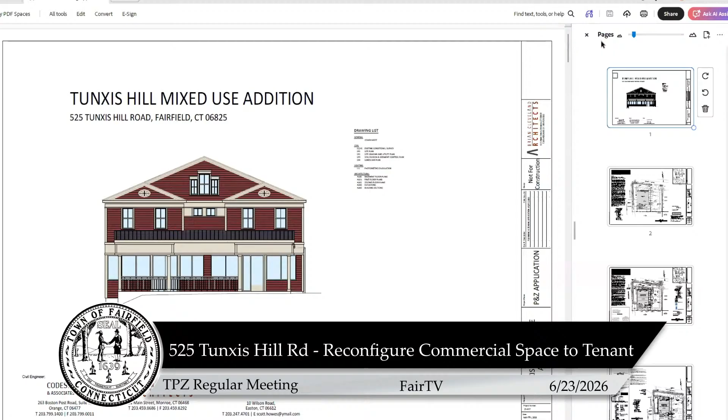So here you can see the overall existing site plan. There is also a sidewalk that comes up from the handicap parking space here to the covered walkway that comes across the front of the building.

The face of the building is currently 13.7 feet away from the property line, and I know that's going to be a point of conversation because I believe the regulations state it needs to be within 10 feet of a property line. Obviously, moving this building isn't viable, but we are making an extension of the front canopy closer to that front roadway as a way of hopefully meeting that regulation for you guys.

To quickly get into the overall plan of what we're looking at: the plan is to add 2 apartments and a second floor to the building, constructing it over the existing retail space, so we're maintaining the retail space that is there. The 2 apartments will be 2 bedrooms, 2 bathrooms, approximately 1,200 square feet each, accessed off the rear of the property.

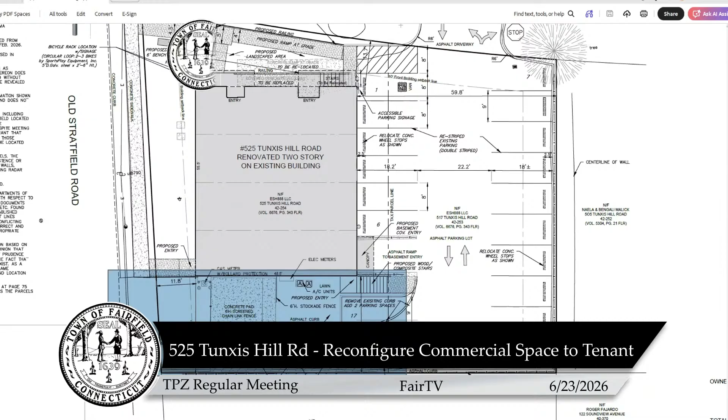We are maintaining a total of 18 parking spaces by eliminating the driveway currently coming in off Old Stratfield as a throughway to the parking area, and adding 2 parking spaces back in this location. All parking spaces meet the Fairfield requirements for size. We are maintaining, though, that apron curb cut off Old Stratfield for continued collection of refuse from the property as well as some snow storage.

We are reconfiguring the ramp at the front of the property to make it a truly handicapped accessible ramp that brings you up to the covered walkway across the front of the building. We've also indicated that we're extending that ramp over towards Old Stratfield to improve pedestrian connection from this corner to the retail space of the building. We're proposing a small bench be located where that sidewalk meets the building, as well as providing a bike rack for 2 bikes to be stored close to the face of the building near the retail area.

We have presented this plan to the Connecticut DOT since this is a state route. One of their comments was that they wanted the addition of a bus stop location here at the front of the property, so we've extended the sidewalk in this area all the way to the curb line for that purpose. I'm sure there will be some bus signage included in this area; you can see that noted here, this GBT sign.

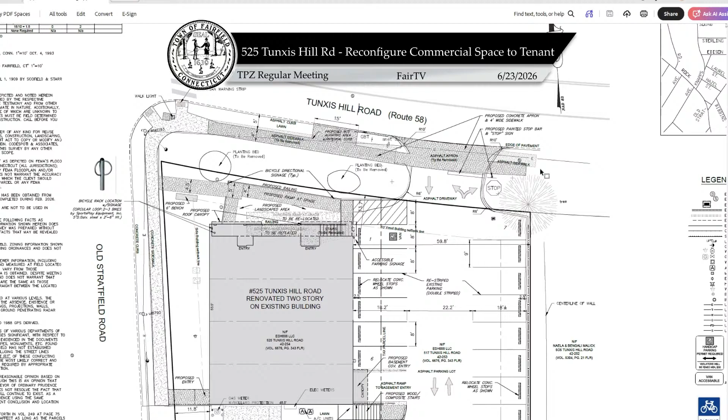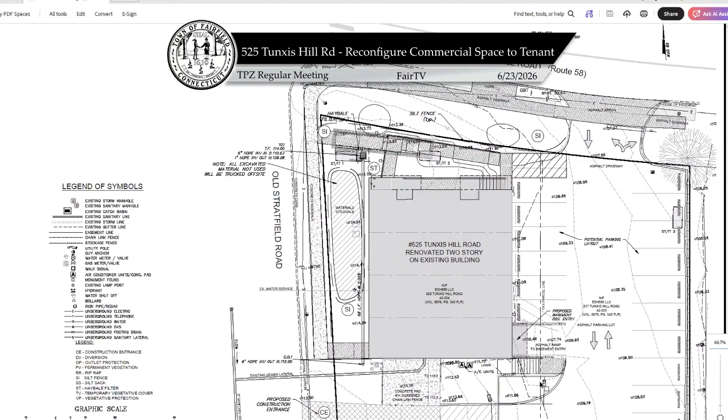I think the next sheet is our stormwater management. Do you want to take this one, Bob? Yeah, I could pick up on that. If you could zoom in on sheet SP2, go back a sheet, Brian. Yeah, that's got the galleries on there.

Looking at this plan under existing conditions, as Brian pointed out, we have an existing building and existing pavement and parking lot. That raises a unique condition with regards to stormwater management, in that the Fairfield Engineering Department has a policy of not taking into account any existing imperviousness on the site. We had conversations with the engineering department, and what they were willing to grant us for this application is that looking at the existing pavement area, they would allow us to take credit for that.

We are providing the stormwater management for the addition, for the second floor addition, because they are considering that to be the constructible area for the project. So we looked at the proposed building footprint area and did the hydraulic calculations, and came up with a gallery system located in the upper area underneath the sidewalks. Those galleries will provide enough storage volume to address the water quality volume in accordance with the 2024 DEEP Water Quality Manual, as well as providing for the 25-year peak rate of runoff for both peak rates and volumes of runoff. That's basically a quick overview of the stormwater management system for the project.

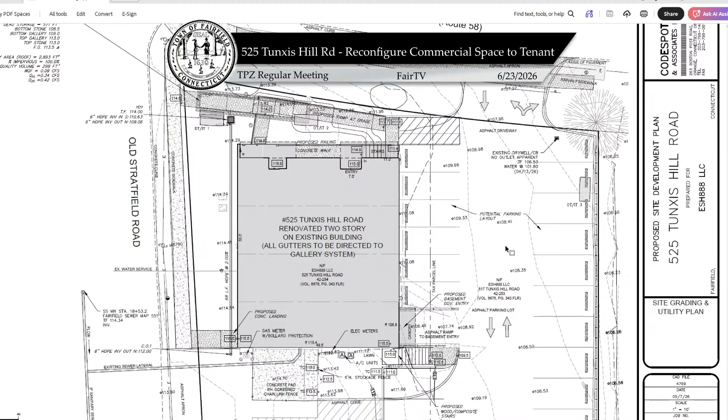So I guess once Brian wraps up with the rest of it, if the commission has any questions, we'll certainly try to address them. Thanks, Bob. To move on, we have the typical details in here relative to the soil erosion and sediment control measures, with some typical details, I think from your guidelines.

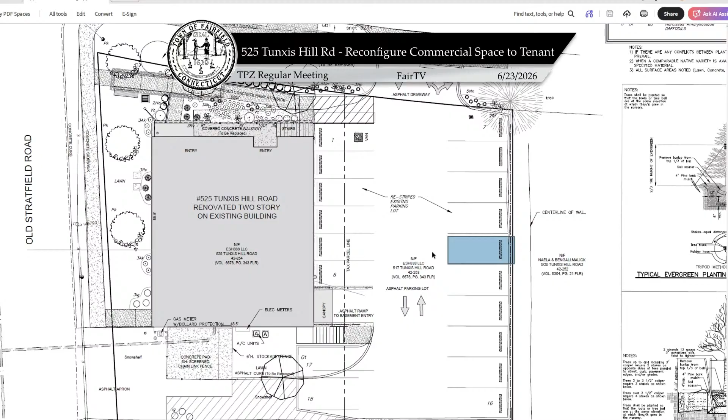The landscaping plan - unfortunately our landscape architect couldn't join us this evening, so I'm going to try to go through his plans and point out some things. I believe some of the regulations in Fairfield state that for every 10 parking spaces, we're supposed to provide a shade tree within the parking areas. We have an existing tree at the corner of the property, and we're proposing a new shade tree near the rear of the property to meet the intent of those guidelines. We would not really be able to integrate a new tree into the parking area itself because we're required to provide the 18 parking spaces, and that is how many we are showing here. So we're trying to provide those trees where we have the ability to do that without impacting the parking layout.

Additionally, we are showing an extensive amount of landscaping between the covered front porch here and the new handicap-accessible ramp that leads up to here. So this area in between those two paved areas is shown to have landscaping, as well as some ornamental trees, hopefully that don't get in the way of the signage for the building, and then some low planting along the street side edge of that handicap parking space.

We are also showing 3 ornamental trees along the side of the building, also to hopefully enhance the overall aesthetic of that side of the building. Currently there's no windows or anything there, and it's a very prominent elevation, so we're trying to soften it up by adding landscaping to that area, in addition to the new windows that we're going to have as part of the apartments being added to the second floor.

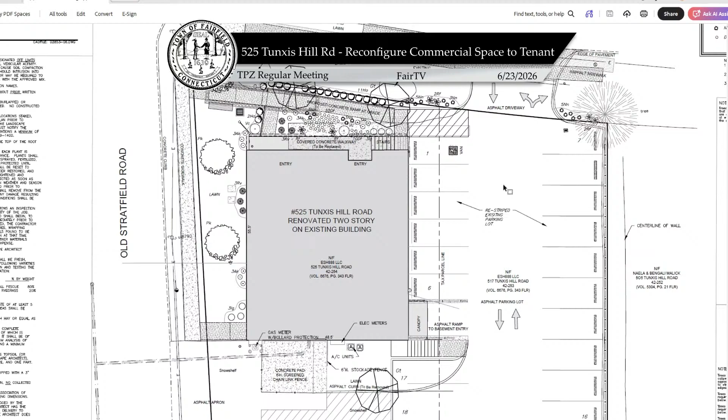We also recently received the Connecticut DOT design details for this development, so we've provided those to you just recently to include in the application.

Access to the apartments is through new exterior entrances on the back corners of the building, leading to independent stairs up to the 2 apartments. Once upstairs, there's a small balcony for each apartment, with normal amenities you'd expect: 2 bedrooms, 2 bathrooms, laundry, full kitchen, dining, living, etc.

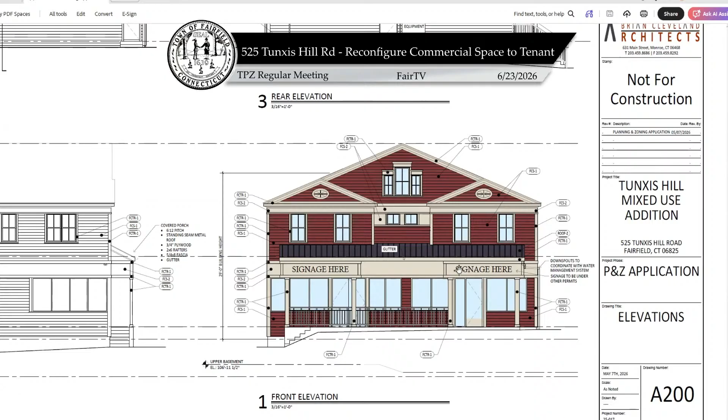It doesn't show obviously, but there's going to be a series of trees planted across the side elevation that faces Old Stratfield, so that'll soften up that elevation. And as I said, we have a series of windows for the apartment up in that area.

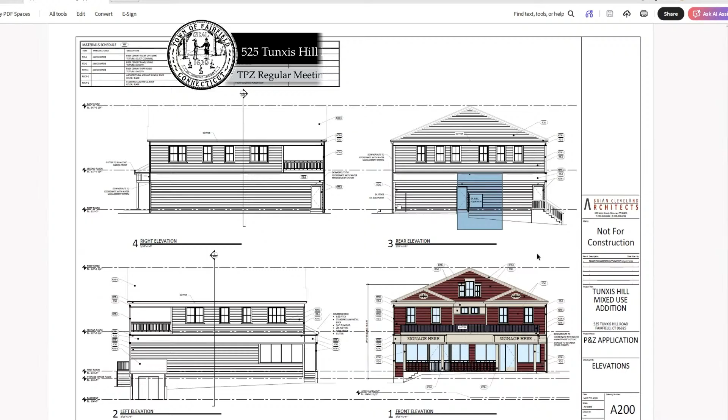All the utilities are going to stay off the rear of the building. The gas meter and electric meters are already there, so we're just expanding them to accommodate the 2 apartments.

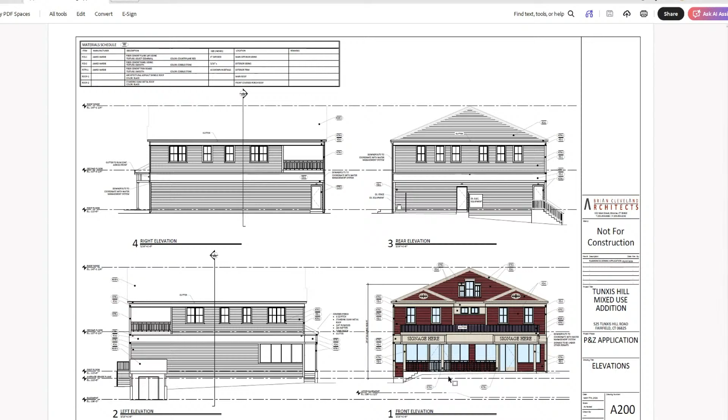As Bob was saying relative to his stormwater system, we're taking all the roof leaders of the building and bringing them to the Old Stratfield side so we can integrate them into the stormwater retention system. The signage will be part of another application the owners will have to submit to get approved, but we've provided a couple of locations for the 2 retail spaces within the front canopy that sticks out from the building.

And with that, I will turn it over to the commission. Thank you, Mr. Cleveland. Questions, Commissioner Monahan?

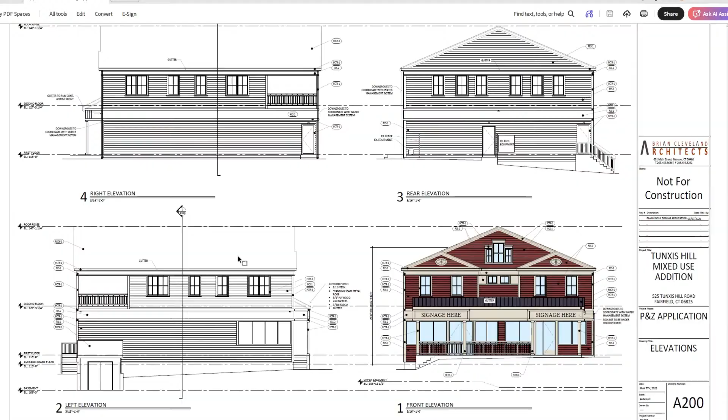So the application reads differently than the explanation on our presentation. It says compliant site plan review request to reconfigure an existing first floor commercial space into tenant spaces and add second floor with residential units. So the first floor will be first floor commercial into two commercial spaces, then two tenant spaces above, correct?

Correct. When I first read this, I was looking at it as if downstairs was also potentially going to be residential. So it's two commercial and two residential upstairs. Correct. Now, the retail commercial spaces don't necessarily need to be made into two units, but we are setting this up so that it can be done that way by adding this recessed door.

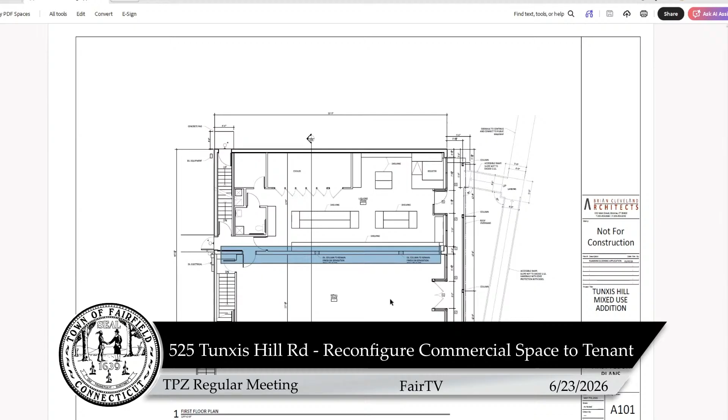This one on this side of the building is already there. And then, as I said, we're providing a new wall in between what could be two commercial spaces. Okay, thank you. Commissioner Levy?

And with respect to the setback, do I understand you correctly? You're going to extend the front awning by about 3 feet? Yeah, correct. So to the face of the building currently is 13.7. There already is an awning that sticks out across the front of the building, but I don't know that the regulations specifically state that awning is part of the building setback or not.

But certainly to the corner of our proposed canopies, we are going to be almost 5 feet closer to the property line. So we're going to be somewhere around 8.5 to 9 feet away from the property line to the edge of our canopy.

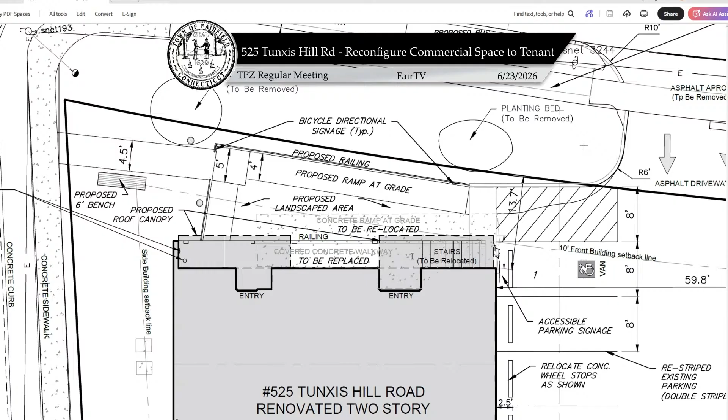And will that awning or canopy be of a permanent nature? Our setback says the shortest distance between any part of the building or structure, so it would seem that it would have to be more than just a retractable awning. And to the extent that unroofed terraces do not qualify, putting a roof over that area would seem to make it part of the building, which could be considered for purposes of setback.

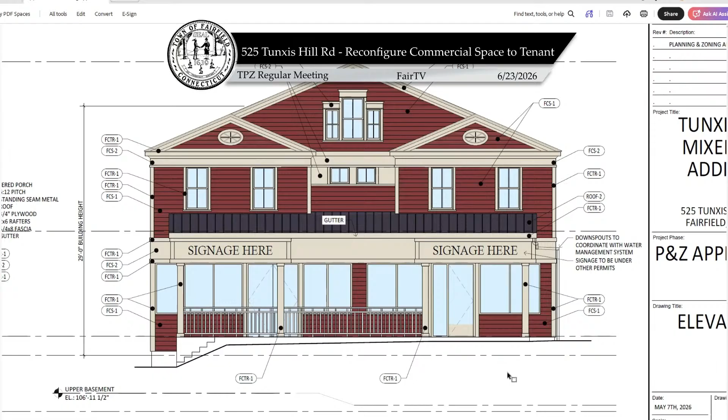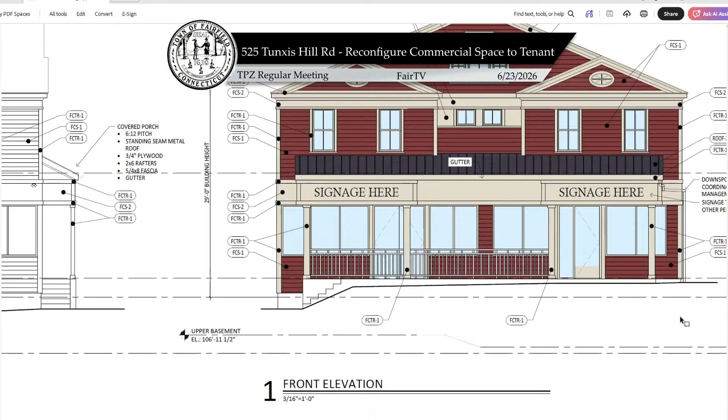So, thank you. Mayor Randolph? Couple things. Right now you said you didn't have enough space in the parking lot for trees. I think we've got a current provision that allows if you have low impact design, you can waive a parking space, correct?

There is a section within the parking regulations that does allow you to modify the parking in order to add a tree, if that's what you would like to do. And this is, I think, our first one where you don't have minimum parking requirements. So had you considered eliminating a parking space to accommodate that tree?

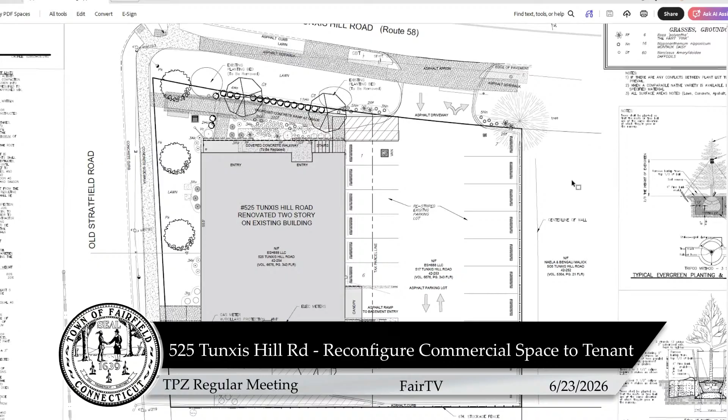To our knowledge, we were going to need to provide the minimum number of parking spaces based on the parking tables that we saw within the regulations. So no, because of that, we assumed we had to provide all 18 parking spaces.

They don't need to, you right? The commission has the ability to modify the size of, under 25.11.6D, two of the spaces to create the inset for a shade tree if that's what you would prefer. Yeah, that would be a request, not a condition.

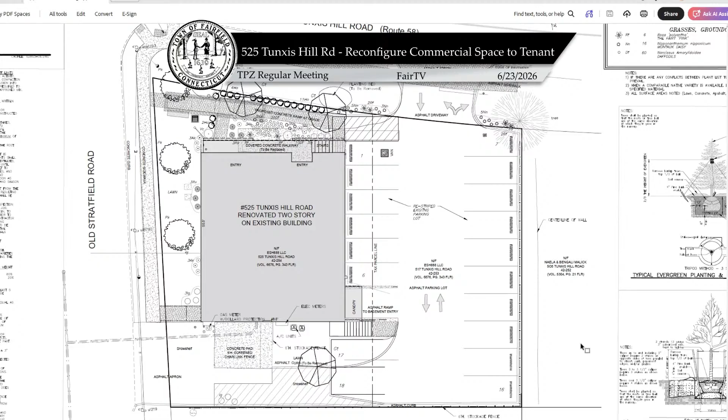So secondly, if you look at your Old Stratfield Road elevation. We're working on design standards. We don't have them passed yet, but one of the things we're trying to avoid are blank walls. And you got a big blank wall there. Is there any way you can not have a blank wall? I mean, other than just doing it with fake trim work, which is not necessarily windows? The retail space really does require having that wall space within it for display.

Clerestory windows? I mean, we can certainly entertain it. Based on the fact that we do have windows on the second floor, we believed that we met the intent of that requirement, as well as the fact that we are going to be planting along that elevation.

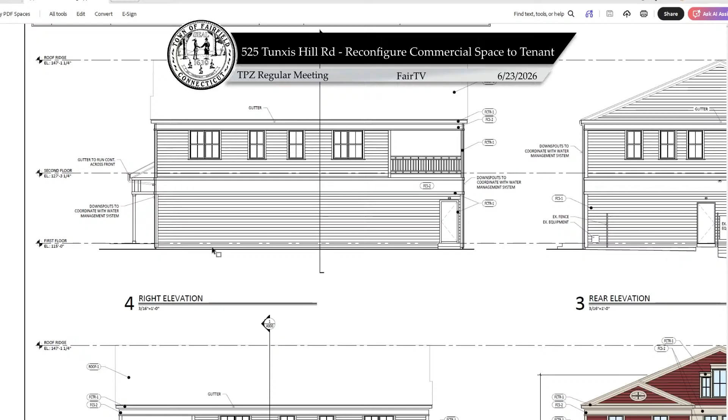Well, we haven't passed it yet, so you comply with the current standards, but we've got a new standard that basically tries to avoid blank walls, and this is a big blank wall. But I have to say, the design of this building is thoughtful. It's a positive contribution to the neighborhood. There's some pretty utilitarian buildings around there, including the existing building. This is really a thoughtful design, mixed use building, the type we really want to encourage. I can tell that some really good intent has gone into it, and we appreciate the thoughtfulness of this.

All right, other questions from the commission? I have one more question, Commissioner Monahan. Is there a reason why the liquor store would remain on the corner and not be on the side where the parking is? I mean, you would think leaving the liquor store, you'd want to be as close to your car as possible with heavy bottles, boxes, et cetera.

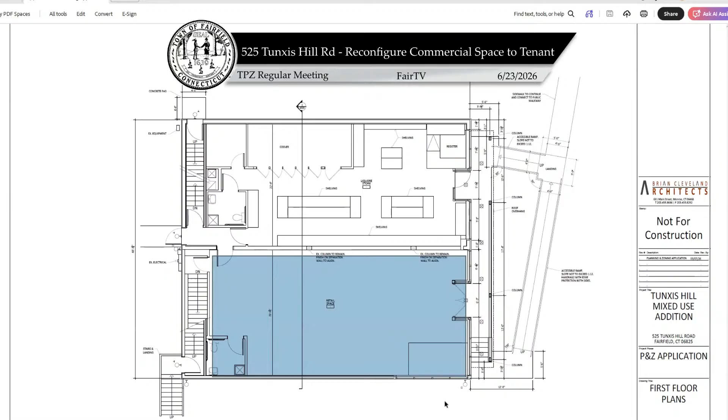And that would maybe alleviate the flat wall if you brought the windows over to the other side. I know you have your own plans for the building, I'm just asking if you thought that was important. Based on the understanding that the owners are going to want to have a space here for themselves, the access to the basement is from this side of the building down this set of stairs. So having the liquor store on the parking lot side of the building is not really feasible relative to how the owners are going to divvy up the space.

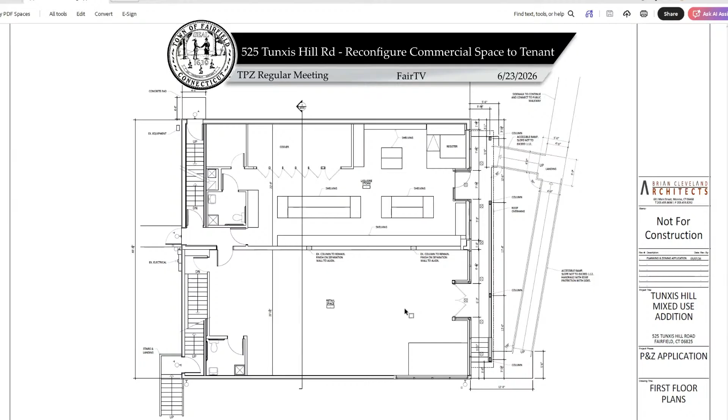Any further questions? I have a question. Go ahead, Commissioner Brown. How many bedrooms are in the 2 units, and how many residential parking spaces are dedicated to each bedroom in each unit? So we have 2 bedrooms for each of the 2 apartments, so a total of 4 bedrooms. Per the standards, we were showing 2 parking spaces. I believe it's 2 parking spaces per dwelling unit.

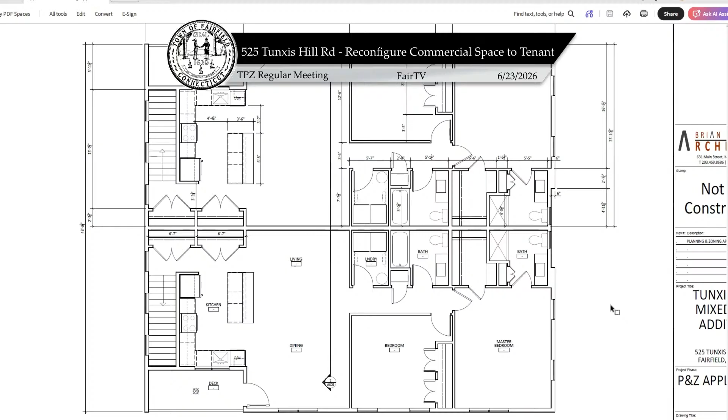Okay, and our agenda does not state which regulation this is being applied under. I'm trying to figure it out. We have the design business district revised regulations, which under those, to me, this would require—and by the way, I think your project looks quite beautiful, much better than what's there now. I'm trying to understand if we're following the right regulations. So a compliance review would not be allowed under our design business district regulations because you're doing exterior modification, right? Quite a bit of exterior modification.

But then we have another regulation that allows conversion of commercial to mixed use, which would be under a compliance review, but I believe that requires the commercial to have been vacant. Perhaps you or our planning director could explain that, so we know what regulation we're going under here.

This is a compliance review. Right now, the liquor store is not vacant, but they are adding 2 residential units. So per the regulations we adopted, mixed-use developments are by summary site plan review, not a special permit.

So many folders. So it's under section 7.4.1.

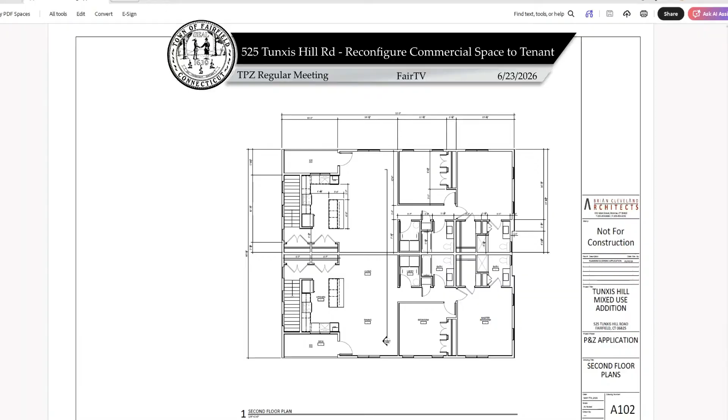So this is an existing 1-story commercial building, which is simply adding 2 residential units via a second and third floor above. So this falls underneath the requirements for a site plan review within 65 days only.

Although 6.3.4 seems to relate to residential to commercial as opposed to the reverse, which is what this is. I think what makes it a little confusing is that they're not tearing the building down and building a new building, but it's not a conversion.

What, then, is a conversion? Converting commercial into mixed use. By an addition -- pardon me? -- by additional square footage above a pre-existing ground floor commercial space.

Okay, so just so we could all be clear, the regulation we're going under is 6.3.4. Is that spelled out somewhere? I don't see it anywhere, but... And you're looking under Z, which is page 27 of our updated zoning regs.

Residential provided, shall not be located on the ground floor -- that's a permitted use, which does not require a special permit. But again, at the top of all the designed business district regulations, it says if you're doing exterior changes, it does require a special permit, because there's a different type of review for a special permit versus compliance.

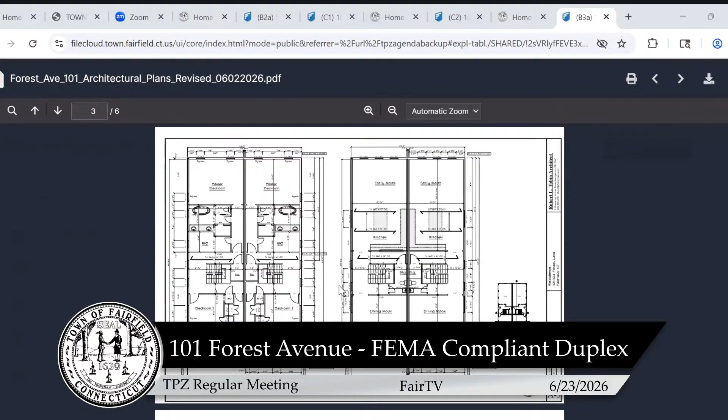Yeah, I'll just ask my question. I know Mr. Mullins is not here, but you guys are familiar with this. We're just pulling it up. Does that have everything on there? Okay, do we have the survey, is that part of this? Maybe on the other sheet. Director Horgan, it's a different file. Okay, so if we go back, Forest Avenue 101 site plan revised PDF, we'll just go to home. No, it's not the architectural, it's a separate one. Just press OK. Okay, just go to the site plan revised. Okay, second one there, that one, not the, yes, okay.

Yeah, so scroll down, keep going to the bottom. So yeah, it looks like this whole area in the front, the bib, is all impervious. Yes. Does that meet our standards? It's not the beach district, so only in the beach district do we not allow for impervious driveways. In other areas of town, they can provide an impervious driveway, they just have to provide stormwater detention for it.

So the trench drain accommodates that? Well, they do the calculation based on all the impervious coverage for the site, and then the trench drain probably connects that based on the drainage flow and then sends it back to the system. Yeah, so that curb cut is gonna be 40 feet? 30, I see 20 dimensions, so the curb cut's 40 feet? Generally for duplexes, yes, they end up having to provide independent access for each side. Even though it's a single parcel? Yes. We've got no regs that prevent a 40-foot curb cut? Not for single family residential parcels.

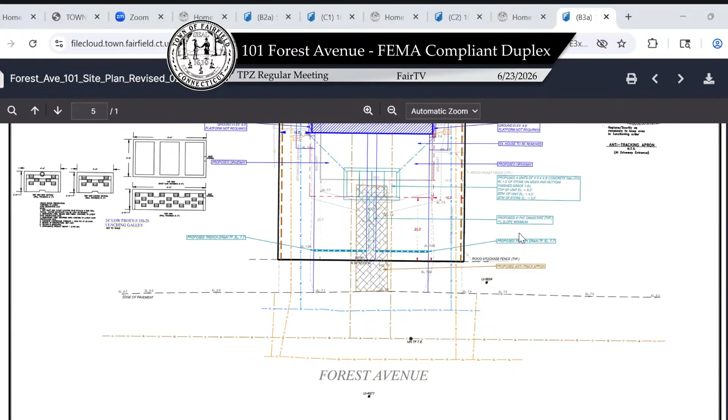Through the chair, but my concern is that we don't have a mechanism. Well, but this is not really super germane to this, since it's not in the regulations, which is what you're getting at.

So we can have this conversation in potentially considering another regulation to address that. But Commissioner Monahan's right, there's nothing to do with the current situation. I think there's no sidewalk for a reason, and we don't have a regulation currently to give us some mechanism to address it offsite.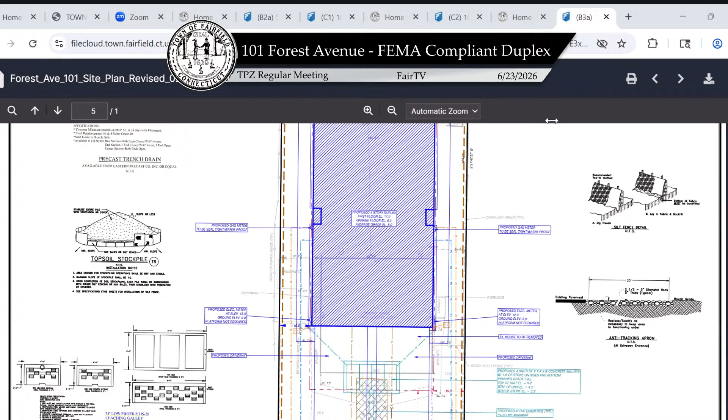Okay, all those in favor of the motion to approve with staff conditions and to adopt the findings as articulated by staff, please raise your hand. Thank you. Motion passes unanimously.

Next, we'll go to our public hearings, beginning with 1073 North Benson Road, a special exception application request of Fairfield University for a new campus building, Innovation Hall for science and engineering studies, in a Residence R3 zone.

Good evening, Attorney Fallon. Good evening, Mr. Chairman, members of the commission, good evening to you, members of the public. For the record, my name is John Fallon. I'm here representing Fairfield University, and we're very proud to bring before you this evening our proposal involving the new Innovation Hall.

I described that in some detail in our statement of use, but I'll briefly summarize it. First, as you'll see tonight in our presentation, we're located in the heart of the university's academic corridor. We're not visible from outside the campus. And what we're seeking to do here is address the growing need for sophistication in what they call STEM education. What is STEM education? I had to learn that myself. STEM education is an interdisciplinary approach to learning, integrating science, technology, engineering, and mathematics.

In addition, you'll see that our current needs in the School of Engineering require additional space. The reasons for that are clearly that current engineering trends call for increased space per student and an increased amount for equipment storage. The Innovation Hall is designed to address those specific needs of our School of Engineering, which is presently housed at the Bannow Science Center. The new building will also be home to academic centers of excellence, such as the Center for Coastal Climate. These centers are gathering locations for existing students and faculty to collaborate on pressing social needs, as highlighted by the research and accomplishments of our faculty and students.

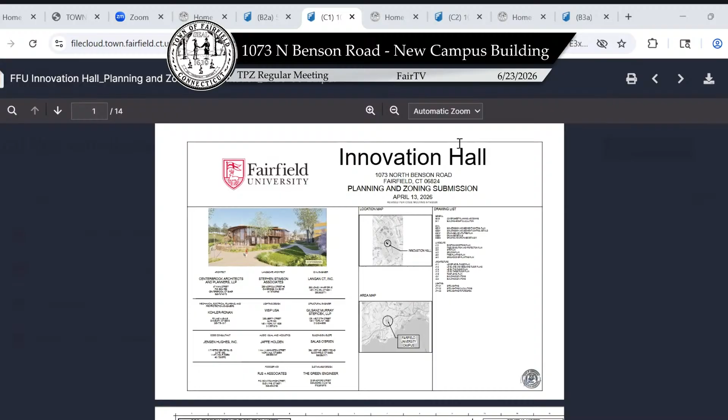So what this really is, Fairfield University's reputation has grown astoundingly over the last few decades, and I think this commission, without pandering, deserves a great deal of credit for that, for sharing in our vision and allowing us to establish such a preeminent institution of higher learning. This is another example of where we are seeking to continue adapting to academic needs and the needs of our existing students and faculty. I emphasize that because this is a program and a building that will serve the needs of our existing staff and students, and is not designed, nor will it in any way, increase enrollment. What it will do is enhance our current student experience, as opposed to any enrollment growth.

It will capitalize on existing infrastructure for parking, dining, and all other student support services. And there won't be any increase associated here with traffic whatsoever.

What we'd like to do this evening, with me tonight is Mr. David Frasinelli, our Vice President for Facilities, Campus, and Auxiliary Services. A number of consultants have worked very hard on this proposal, and I'll introduce them shortly. I'll start with Greg Tizzolo of Stimson Studio, who will review with you, based on the plans you have, the existing conditions and the proposed site plan. Greg.

Good evening, commissioners. My name is Gregory Tizzolo, landscape architect with Stimson Landscape Architects. Thank you for having us. I'd like to give you a quick orientation to the project as it sits in the campus. You can see the building in the sort of S-shaped arrangement, sitting right in the middle.

But maybe what we'll first do is skip ahead to a slide. This slide shows an existing survey of the site as it sits today. The site is covered in a fair amount of trees, the campus chapel to the left, the campus center to the north, and the Bannow Science Center to the right. The site has approximately 23 feet of grade change, the high point on the north side of the page, sloping down to the lower right.

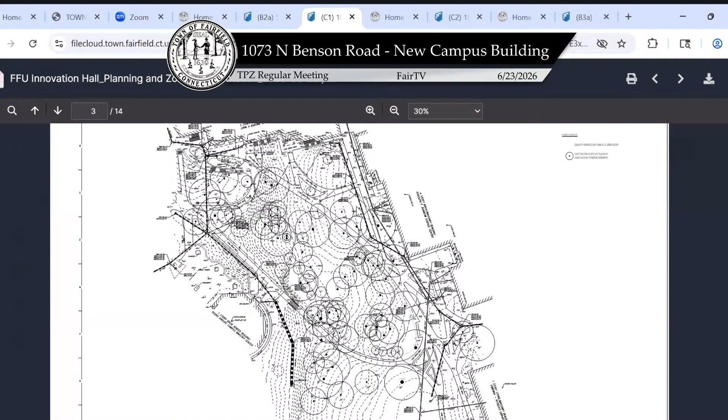We performed an arborist survey of the site in question. If you could go to the next slide, please. We performed a tree inventory, did an analysis of 94 trees on site. A number of them will be removed for the project. I'll talk a little bit later about the trees that we're proposing to go in their place, but it is the case that a number of these trees will be removed.

Amongst the trees on the site, predominantly oaks, red and white oaks, but there are some non-native Norway maples and black cherry. Those are native, but not desirable. So we can talk a little bit more about trees in a moment. For now, you should just know that a number of removals will be required for the project, and we're taking those considerations very carefully.

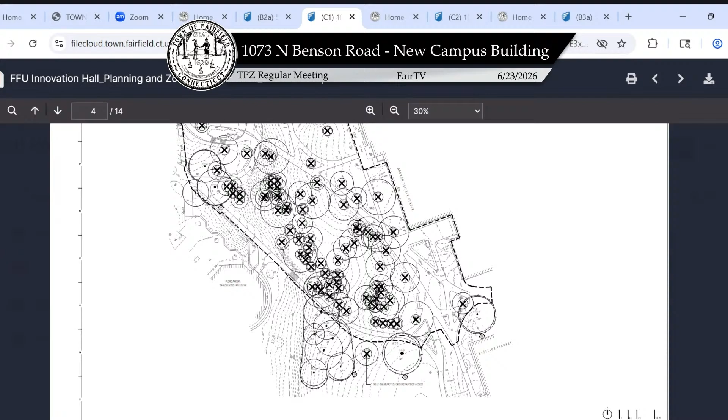On the perimeter of the project, you can see in the dash line our approximate limit of work, limit of disturbance for grading. There may be some additional disturbances outside for things like stormwater management, et cetera, but essentially for the regrading of the project, everything is happening inside the dash line. I think you can see on the south a number of trees that are kind of peripheral to the limit of work that we're taking measures to protect through tree protection during the construction process. Next slide, please.

This plan is simply showing the ground plane materials. There's no trees shown on this drawing, but essentially what you'll see is a series of reestablished campus pathways. On the south side of the building, between the chapel and the new building, is essentially a recreation of an existing pathway. This pathway has stairs in it. It is not ADA accessible, but it's sort of a minor route in terms of campus circulation.

The main... let me orient you to the doors first. In the upper left, we have a door. That's up on level 3. And then if you look to the upper right of where the arrow is, there's additional doors right opposite the campus center, down 1 level. So that's at, I believe, level 2.

And then along the right side of the building, you see that long S-curving path. That is a pathway that's been elongated to allow for ADA compliance. So essentially, we're creating accessibility throughout the project site. It doesn't really exist today; that's an overall improvement the project brings to the site by creating this ADA accessibility route through campus. And if you follow that curve all the way down to the lower right, there's an additional entrance down at level 1.

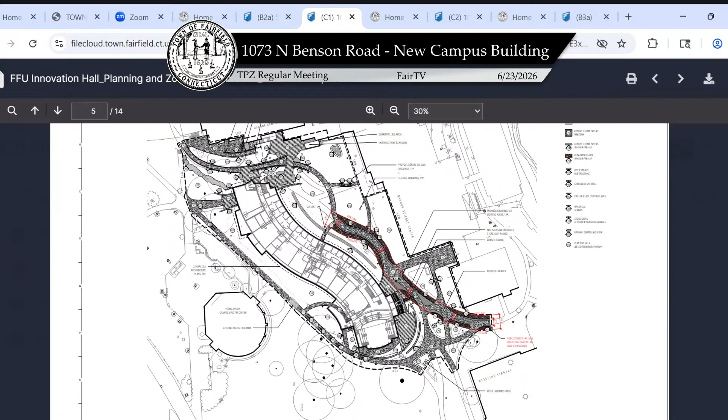On this sheet, in the submission there are two plans that talk about planting. This one talks about the tree canopy. I mentioned 94 trees were surveyed; we're able to protect 11 of those trees, meaning 83 are coming out, and we have 47 going back in per this plan. We tried to plant as many as we could, and felt this was an appropriate number to revegetate the site without overcrowding it in the future. We're replanting with native species with great longevity, an investment for the campus for the long term.

I believe that's the last slide I'm going to speak to. Could you slide down one more? I think that's right—I guess maybe some... Brian? I'm all set. Yes. Okay, thank you. Greg will obviously be here to answer any questions you might have.

I call on Brian Phillips of Langan Engineering. I think you know Brian well from his representation of the university on numerous of our other proposals. Brian's going to give you an overview of the proposed site engineering and drainage. Thank you, Attorney Fallon. Yes, I'm Brian Phillips, a professional engineer with Langan Engineering. We're at 555 Long Wharf Drive in New Haven.

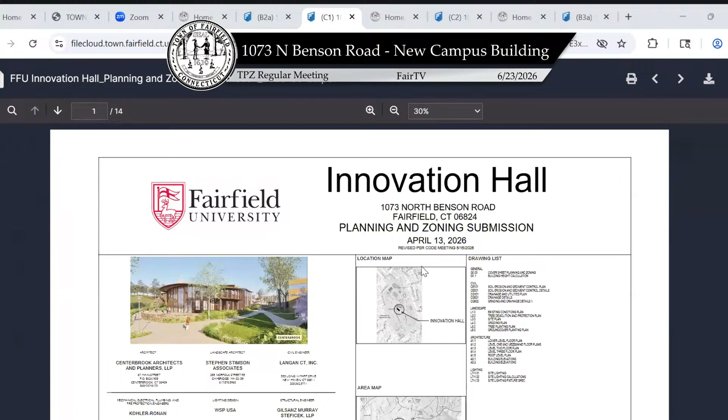I'm not sure if it's the previous page, but the first page, please, after the title, shows the grading and drainage plan. So the proposed infiltration system is at the bottom right of this page, located at the lowest elevation point of the site, allowing everything to flow by gravity.

Everything will be collected into the system, given an opportunity to infiltrate into the ground and promote infiltration and recharge of the groundwater table prior to being discharged through a weir structure, allowing the water to be held back. Then during larger storm events, it flows over the weir and is directed down towards the campus stormwater network.

We did perform some borings and test pits on site, so we were able to get a profile of the soils, and we will do additional testing for construction as required by Fairfield Engineering to reconfirm that analysis.

Did you do the double ring infiltrometer test in the area where the infiltrator galleries will be? We have not done a percolation test or borehole infiltration test yet. This area is a heavily trafficked, very central point of campus, so we're trying to be mindful of when we do this testing and start poking holes in the ground. But we did do borings, so we have a good understanding of the soil conditions in this area.

I'll note that our analysis takes into account a very low infiltration rate. Traditionally on campus we've done infiltration tests all over, and we've seen rates of 5 inches per hour or greater. In this analysis, I believe we used only about 1 inch per hour. So even if we had more, it could cause the system to get smaller. We're not proposing that here, but that's what that essentially translates to.

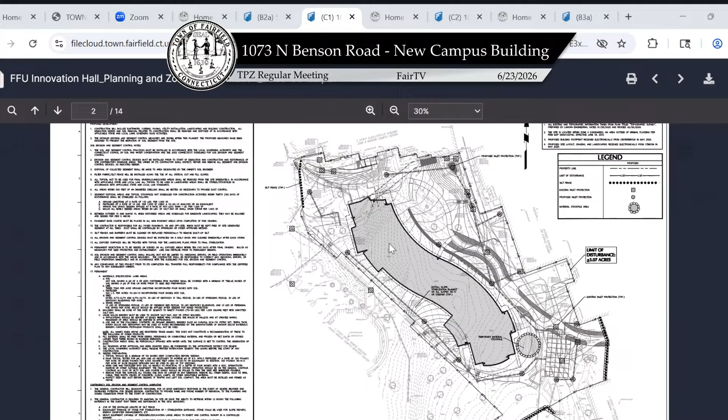I will briefly walk you through the floor plans and then show you the elevations, and then we'll end on the height calculations, which I believe we meet the zoning regs. So the lower level of the building, which Greg alluded to on your left-hand side, is a 350-seat exhibit hall. As you work your way to the right, there are mechanical labs, offices, a drone lab, bathrooms, and other labs associated with the program, and then a mechanical area to the far right.

What we're proposing right now is a tunnel that ties into Barone for utility services, trash removal, and so forth. On each floor, the upper level is primarily labs, and on the lower side of the curve are offices. We can go to the next level.

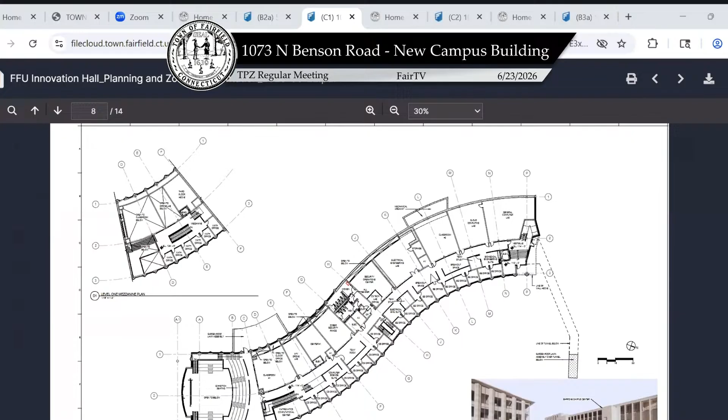We do have a little mezzanine area as we come up the stairs. You primarily enter the exhibit hall to your left. As you work your way to the right, there are offices on the right-hand side, labs associated with each of the programs, and the centers and classrooms are located on the west side of the building. You can see as we come up, there's an elevator on the right-hand side, and you start to see the stair, which is what Greg alluded to.

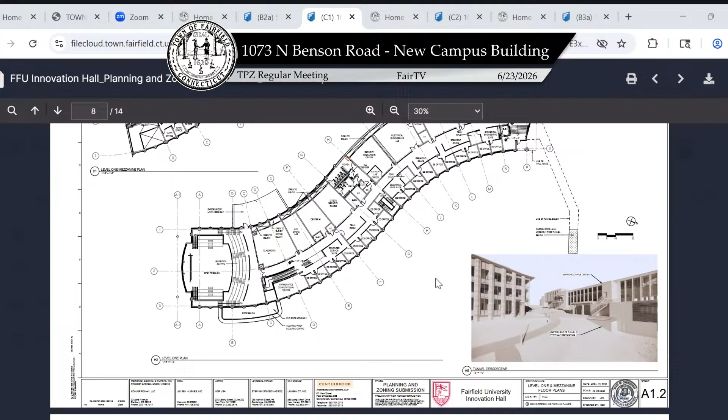There are a lot of different ways to enter the building - this would be the first entrance on the left, and the second one on the right. As we go up another level, you'll see this curved sloping roof with a vegetated roof and solar panels. Because of the shape of the building, on this level there are computer labs and senior design studios on your left, and more offices on the right. At the end there's a stair on the north side, and another entrance at the very top. These are all offices related to either mathematics or the engineering building.

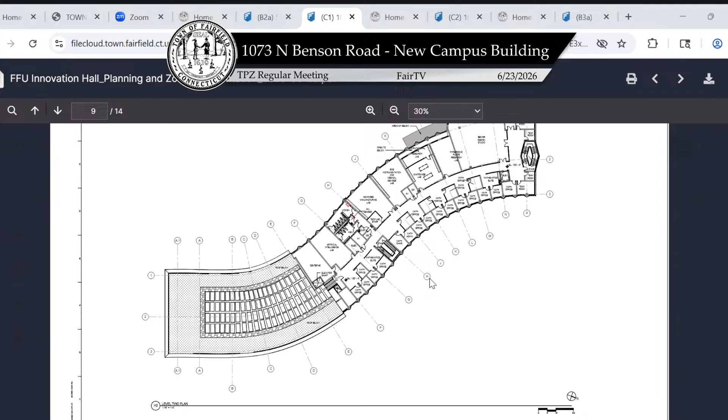We can go up to the next level. Again, as we come up looking at the elevation, you start to see the floor plan includes a graduate lounge, bathrooms, centers, 2 wet labs, and the dean's suite on the upper left-hand side.

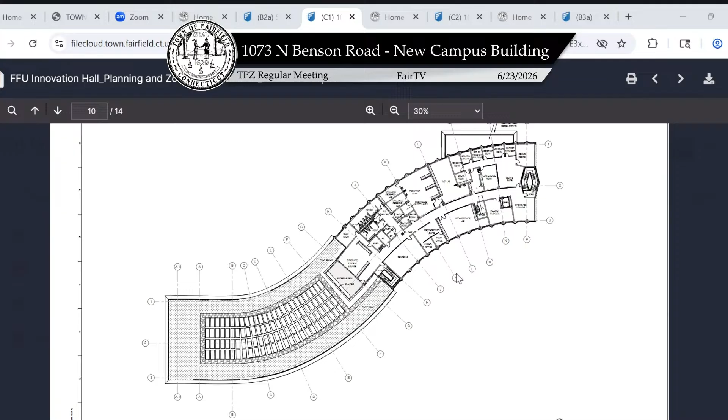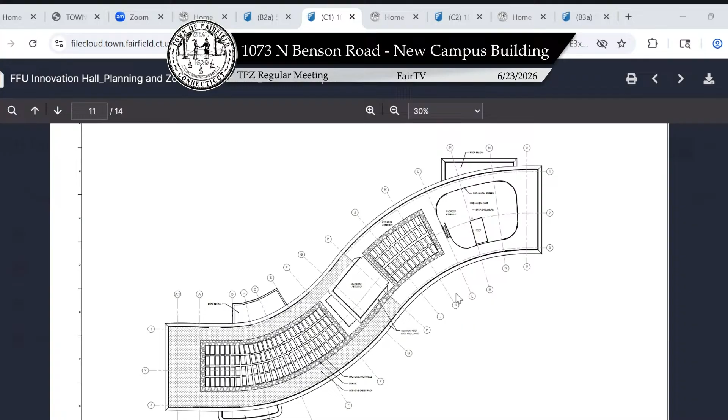So that kind of marches you up to the building, all engineering related programs, offices, classrooms and centers. If we go to the roof plan, you'll start to see that we have a green roof with solar panels. The roof is not only curving as an S, but it's also curving as it goes up. You'll see there's a little dormer for the graduate lounge, and at the far right is the mechanical service yard for the air handling units.

You start to see the shape of the building is defined by these very vertical columns, alternating between glass and either metal or glass. You'll start to see how that roof swoops, but it not only swoops as it goes up, it's also trying to bend itself around through the S curve. So it's kind of complicated. We're working on modeling it, but it definitely gives that innovative feel to the building within the heart of the campus.

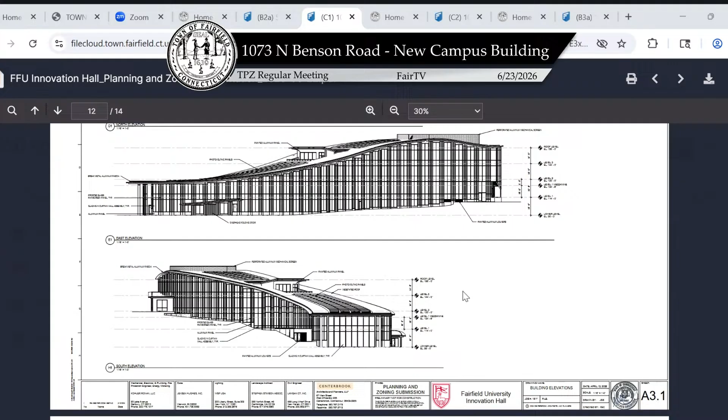If you scroll down a little bit, there we go. You'll start to see the north is on the right-hand side. As this roof starts to slope down, you have a dormer for the graduate lounge, and then it comes down, and at the very end, that's the exhibit hall.

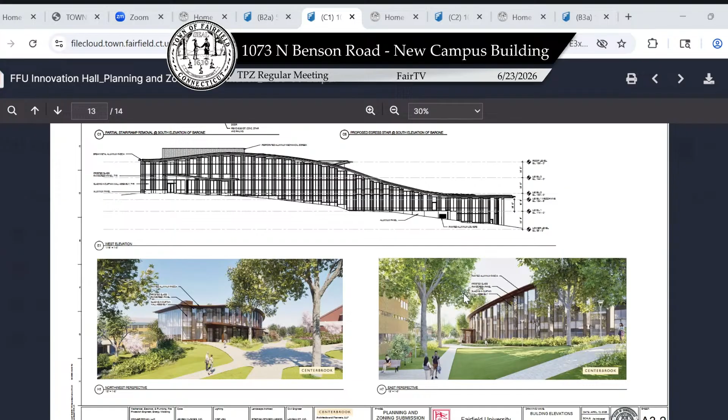So now you kind of get an overall shape. This is a view of the west side. You'll start to understand how that slope works. And at the bottom too, we have the renderings of the building, giving you a sense of flavor with the materials noted of what the building will look like integrated within the heart of campus. The next slide takes you to showing how the building complies with the regulations for height.

Thank you, John. John, I think there may be questions. Is this your last one? He's our last presenter. And I'll have a very short summary, but I'll work backwards.

The issue that neighbors have, besides stormwater, is lights and visibility. Have you done any visibility studies to see whether this is visible to the neighbors, whether this is going to cast a lot of light? Because school buildings are usually illuminated at night. Let me ask another light question then. Are we dark sky compliant?

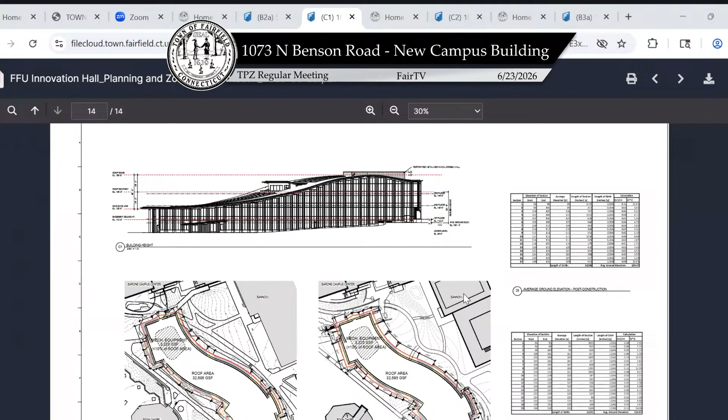Absolutely. If you have the full submission, you'll see that there are photometrics in there and all the fixtures are dark sky compliant. I can't remember the exact verbiage as to what it is, but it is noted on the photometric plan. We did submit, notwithstanding the location of the site, the photometrics plan.

And so that is part of your record. But as a practical matter, as you're familiar with the campus, and where this is being located in proximity to the Barone Campus Center, and the library is another point of reference, it really does not have any visibility off of campus. It's no higher than those buildings. I don't think we get the photometrics, but actually, oh yes, I see here, it is there. Different format than we usually see.

So working backwards on the questions: stormwater, Commissioner Crisilo asked about this. We have to ask about it every time. So I guess as a condition of approval, we'll make sure there's no excessive rainwater discharge into the town stormwater system. The way this has been designed, we are reducing our peak flows rather significantly, on the order of 30, 40, sometimes even 50% from existing to proposed conditions for all storms up to and including the 100-year storm event. I won't get into the details of asking how you're doing it, but that's required on every project.

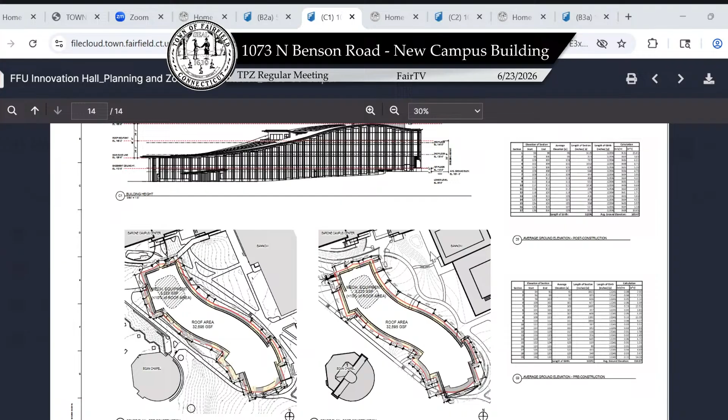Have you studied that? We have that data analysis. Identify yourself for the record. Sure, Greg Tizzolo, Stimson Landscape Architects.

Yes, we have that data. It was not submitted as part of the package. It's significant because you're taking out some very mature trees, I assume. But if we could do a study and figure out how to replace those, I'd say at a higher ratio than what you're removing, either on campus or in town.

So either if you put them on campus, that would be acceptable, or put them along Barlow, Round Hill, which are starting to look pretty neglected. The town streets surrounding the campus could look a lot better. So if we can figure out a way to basically replace those caliper inches that you're removing at a higher ratio than 1-to-1 around the perimeter of the campus, maybe approaches to the campus, so it benefits not only the campus, but the town. That would be good compensation for cutting down what's probably one of the last mature copses of trees on the campus.

We obviously have a 210 acre campus, so on one level, we have good opportunity to do mitigative planting of the kind you're talking about. On the other hand, Commissioner, as far as off-site planting, I don't know whether we'd have to involve the tree warden. Would the intention be that the plantings on the perimeter would be on our property, or out in the town right of way?

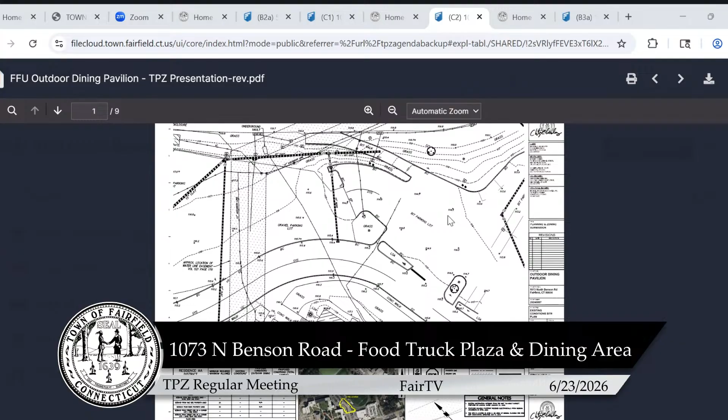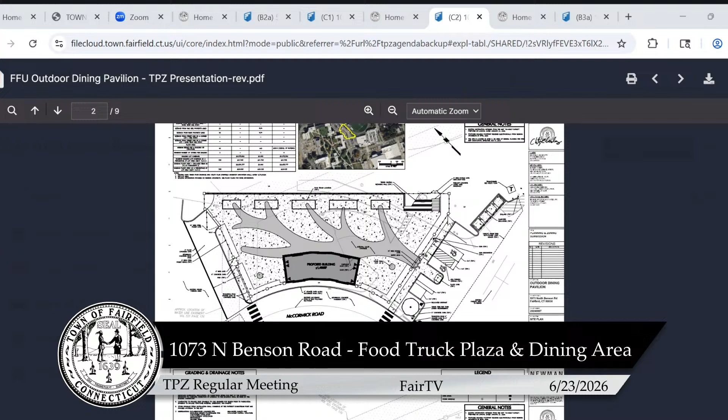In 2017, the university brought its first food truck to the campus with a temporary tent across from Loyola and Campion Hall, and that's sort of where the food trucks have been ever since. When COVID hit, we took what was then a small pilot program and saw that it offered students a lot of convenience, variety, freshly prepared meals, et cetera. And we expanded the food truck area to 5 food trucks.

We then put up a tent which had some seasonal heating in it. The students loved it and they love it still. Indeed, a good 15% of the meal plan usage on our campus is via the food trucks. And it's not surprising because it offers them variety. The trucks change over on a daily basis—some cater to the morning and brunch crowd, others in the evening. But it's really become a very fundamental part of campus living for our students.

And it's been ongoing now for almost 6 years, and we've never had a complaint by anyone. We're proud of that. So what we bring to you tonight is an opportunity to do something good for our students, good for the aesthetics of the campus, good for the general area. That is to create an overall plan to make more structured, more organized, and more aesthetically pleasing what has become a very important part of our campus living and dining experience.

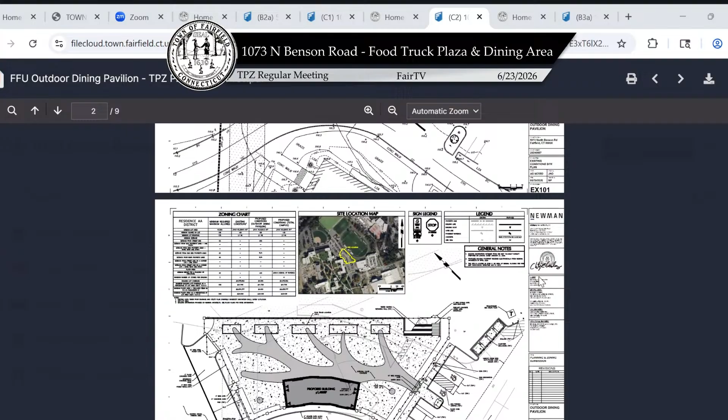Thank you, Brian. Again, Brian Phillips, professional engineer with Langan Engineering in New Haven, Connecticut, 555 Long Wharf Drive. If we could zoom into that aerial, it would be good to orient everyone to the project location. This project is proposed in an existing paved area where the food trucks are currently occupying the space. It is relatively central in campus, between Lessing Field to the northeast, Loyola Hall to the southeast, and the main quad, along McCormick Road. To our closest property line, essentially to the northwest of our project location, we are approximately 900 feet away.

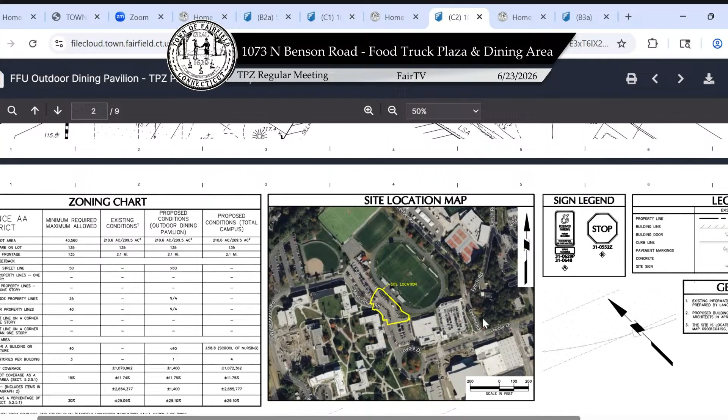If we scroll up to the existing conditions page, these plans have been rotated slightly, so north is to the top, with the north arrow on the right. We've slightly rotated it to fit on the plan, but the existing site is just east of McCormick Road. It's an existing paved area. There are some portions of gravel area, and the majority of the space is currently occupied by those food trucks and a tent structure, a sort of informal food truck area. There are some existing drainage and other utilities that crisscross the site, which I can explain in more detail a little later.

If we scroll down to the site plan, a page up. Just where the area was. Right here. I'll invite my colleague, Joe Vini, landscape architect with Langan as well, to help explain some of the improvements and site features that we've included in the plan.

The goal here is to maintain McCormick Road, maintain the adjacent existing parking lots just outside the existing informal food truck area. And the goal is to create a more defined space with a perimeter fence, which will house a pavilion structure, which John from Newman Architects will talk about in more detail later in the project, as well as a concrete plaza area for students to congregate, get their food from the truck, and enjoy it. A pretty major upgrade from the current condition. So I'll invite Joe to speak in more detail to the site plan and some of the features we've included in the project.

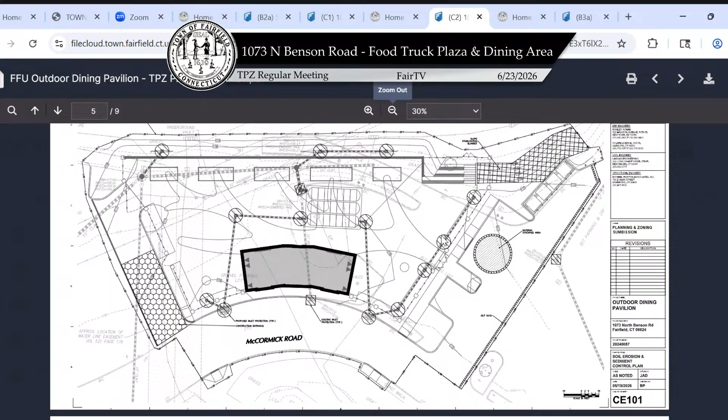On the next page is the erosion and sediment control plan. In this portion of campus, it's very developed, so we have a fairly straightforward plan here of inlet protection and construction entrances, and protections around any soil stockpiles. Then on the next page is the planting plan, and I'll hand it back over to Joe.

Yeah, so just a few images of the trees that are proposed. The honey locust is within the parking lot itself, and then the green giant arborvitae within the limits of the patio space. You can see the understory plantings that will also be incorporated within the planting beds around the perimeter of the patio.

If we go to the next page - hand it over to John Holden. John Holden is our architect from Newman Architects, and he's going to give a brief overview relative to the architectural design. Thank you. So looking specifically at the building, the pavilion itself is a single open room, symmetrical in plan.

There are doorways to the page left, page right, and top of the page that open up back to the plaza. You'll see there's a bathroom core and utilities clustered at the perimeter - that's the lower left and lower right hand corners of the building.

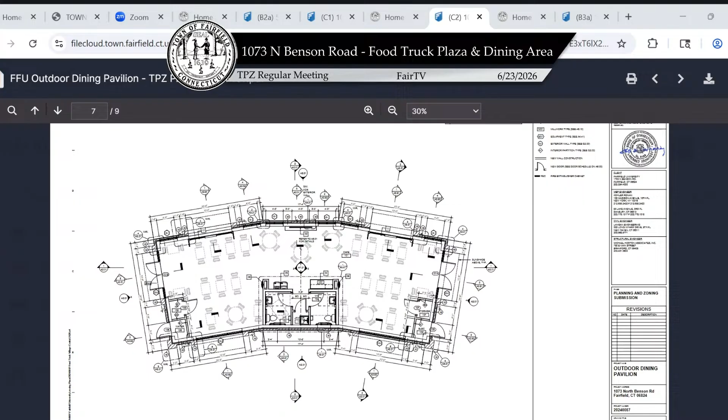For the elevations, you'll see a pitched roof. The materials are a variegated light beige brick, which is kind of consistent with campus architecture, and we have a dark standing seam roof and some awnings over the windows.

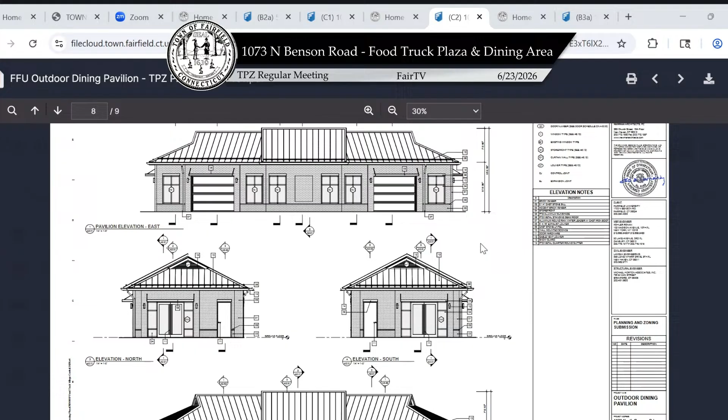We have a rendering too, right, John? Yes, and then the last page, I was told to be brief, so I'm trying to condense it for you all. This is a rendering of the exterior.

This is from inside the plaza, looking back towards the pavilion. You'll see the brick facade, the standing seam roof, and an interior image as well. So a pretty simple building, mostly trying to formalize and create a space that students can use and congregate. It will only provide heating, not cooling. The cooling will be passive via fans and overhead doors that open to allow passive ventilation.

You were brief. That's it. Thanks, yes, John, I appreciate it.

That's really it. We've basically had a 6-year trial run with these food trucks at this location. We've never had a complaint of any kind. We're not looking to expand it. We would keep to the same 5 trucks, as shown on the plan we submitted, with the same volume of use. All we're going to do is create an enclosed, attractive, aesthetically pleasing, more functional structure to replace the trucks just sitting out there now with a tent.

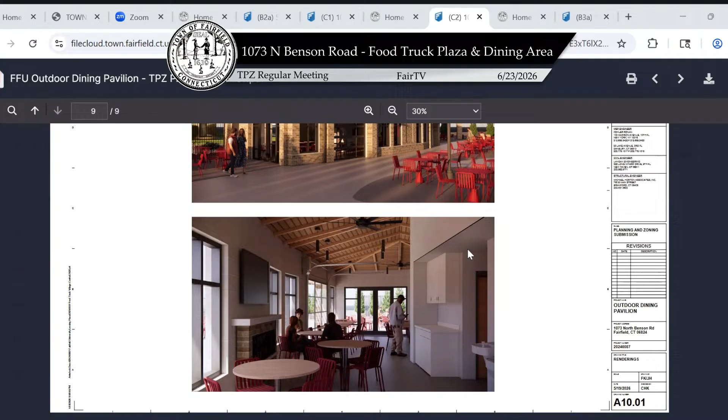On the utility plan, CU 101, one thing I discussed with Director Harrigan earlier about this sort of situation is power. So you won't be running any generators? Is there power provided? I don't see it on the plan here. That's correct, yeah, there are no generators, there's power. Okay, perfect.

And then on 101, I think it's clever, the staghorn design. But is it all asphalt, colored asphalt, or is it something else? No asphalt, it's actually colored concrete. There's an additive that goes into the concrete itself, which pigments it a different color. So the whole area that's not in the antlers, is that asphalt? I'm sorry, that's concrete as well? Yes. Okay, because it was a little unclear on the drawing. So the whole thing is paved.

And lastly, this is really for Mr. Fallon, there's this really nice restaurant in the other part of town called JP's. You ever been there? No. Oh, you've never been to JP's? Where's JP's? It's on the campus of Sacred Heart. Oh, right, I never go there. So they don't come here. It's a really nice restaurant that has public access. Best smash burgers in town, public access.

Is this, I know that for a dining facility it's always a little bit tricky, but will this have public access? Like JP's, they can do it up there, you know, I defer a little bit of rivalry here. For the record, I'm David Frassinelli, Vice President for Facilities, Campus and Auxiliary Services.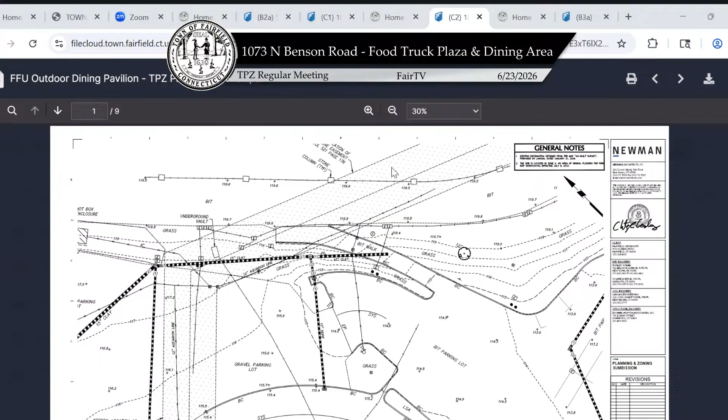I was looking at this drawing, which shows it kind of eating into the parking spots, so that's my question. I think those are now, right David? So again, David Frassinelli from the university. The current parking that has been displaced, that happened a long time ago due to the current operation and the current tent.

It's important to note that the current operation does have blocks, colloquially we refer to them as 'mafia blocks,' concrete blocks, so people can't drive into where the students are. So there is no net additional parking loss associated with this. It can be a little deceptive when you look at a contract limit line on a drawing that looks like it extends further, but that's just an architectural convention. It doesn't mean the area truly being occupied extends beyond that — it's within the wrought iron fence and the arborvitaes that will surround this.

Thank you. Other questions, comments, Commissioner Capote? I was just curious how the food trucks rotate — how do restaurants get chosen, is there a lottery system?

The food trucks that operate there are best described as a hybrid. There are some trucks that we own and operate through our food service, Aramark. There are some trucks that we provide and different operators come in to operate them. And then there are trucks and operators that are completely independent that come in. All of the trucks and the comings and goings are managed by our outsourced food service company, Aramark. Essentially they decide who can come in. We've worked with operators such as Food Fleet, but we are typically open.

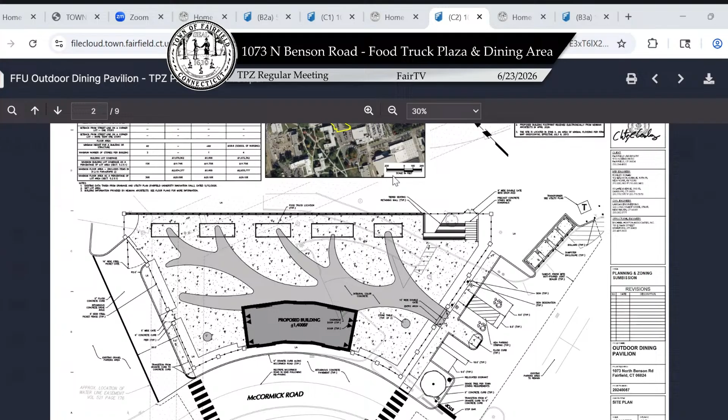So how many trees are you adding again? We can scroll down a few pages. It would be nice to do something other than arborvitaes. I've heard different versions of whether arborvitaes are native or not, but I know they provide good screening.

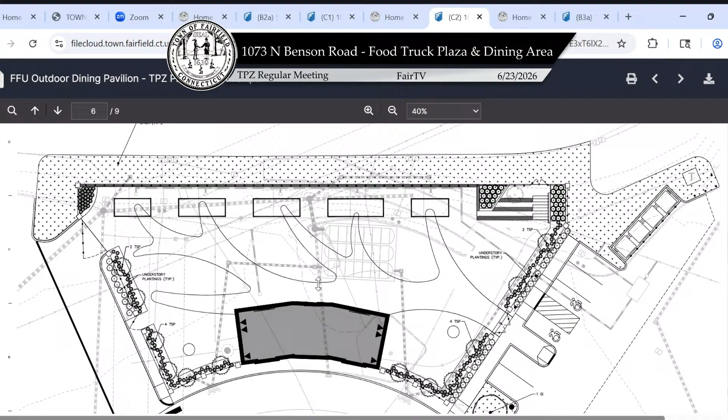The internal pavilion area, I'm told by our university representatives, is going to encompass approximately 65 seats. As I said, it will be heated, so it can be used somewhat more than seasonally. It will not be air conditioned, however, it'll be an open air environment. But to answer your question, approximately 65 seats in there.

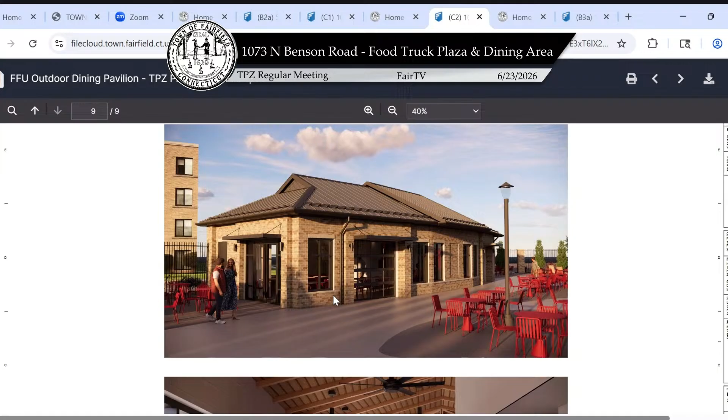With some leeway in terms of how the operator may want to set it up to meet certain demands at certain times, but 65 would be the optimal. This is a pavilion, there's no food prep or anything like that, just waste disposal and restrooms, pretty much, right?

That was all covered with the health department, and their code comments are also part of your record. Yeah, no, it's not — there's no food prep there.

And getting to the perc test, it's interesting that they did perc tests on this one, which is already in a developed area, but they didn't do perc tests on the other one we heard an hour ago. And this one has a different rate of infiltration than they did on the other one. So do you know why they did perc tests here when they didn't do it on the other application?

The man who can answer is Mr. Phillips. Yes, Brian Phillips with Langan Engineering. We were conducting test pits in the area to try to locate some utilities, so I took the opportunity to perform this test pit, which I know will be required by engineering. It was just circumstance that we had the excavator available in this location, and we were able to conduct the test.

And your stormwater system now, how does that change from the one that's already there? There is no system there now because it's just a parking lot? That's correct. So are you adding impervious surface at all? We are modestly adding impervious surface, but the same analysis was performed existing to proposed with the associated curve numbers.

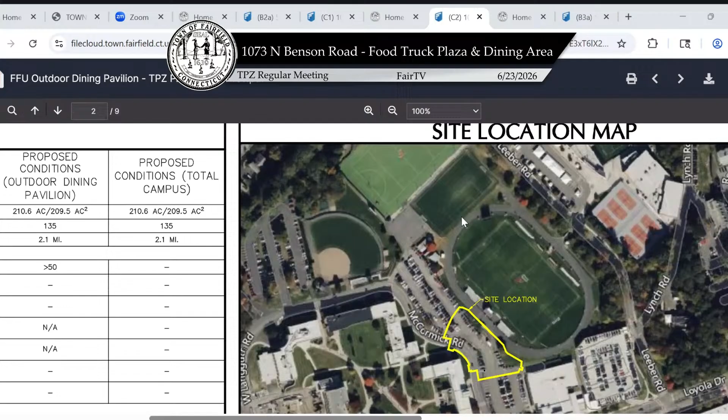So definitely the noise from the softball field now is probably violating the noise ordinance. But it would be ridiculous for me to call the police and say, will you please come and arrest the women's softball team because they're making too much noise. My point is that we don't need any more noise or this kind of development in this particular part of the campus that will affect our neighborhood.

So what I would propose as the fence or the stone wall, whatever, for this project would be that the dining pavilion should be closed at 9 p.m. Sunday through Thursday. The proposal by the university is they want to keep it open till 10 o'clock, 7 days a week. They've also made some representations that for special events, they want to go even later. I'd also request that it be closed at 10 p.m. on Friday through Saturday. The next point, and that would be the first condition.

The next point would be that the university has indicated that they're going to put speakers outside this building. I would request that as a condition, there be no speakers at all outside of this building. We already have speaker noise from the softball field. There's been no part of this application that has addressed abatement of noise or control of noise, just that they're going to put willy-nilly speakers on the outside of the building.

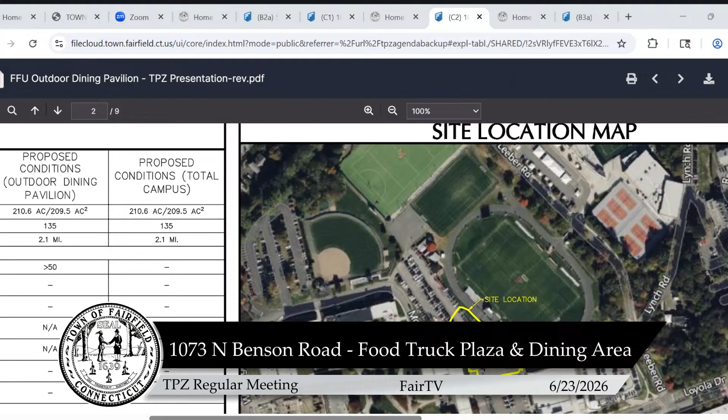The effect of this is also going to be an effect on parking. I know this is something Bob has tried to get a handle on but has not been successful in getting it. If you look at the yellow area in the aerial photo, that shows a big chunk being taken out of that parking lot.

Now, as Mr. Frassinelli has pointed out, that is a construction area. It's not the entire area that's going to be occupied by this pavilion. But that whole area where you see the parking was supposed to be temporary parking, but instead of being temporary, it seems to have grown and grown.

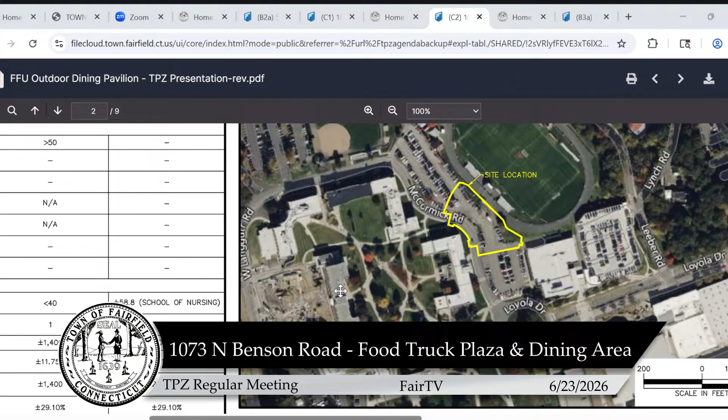Undoubtedly, just looking at this area, you can see some parking is going to be lost. At the area where you go in somewhat from the northwestern yellow line, that's going to be where supposedly there's going to be some kind of screen, giant arborvitaes or whatever screening. So they say this area isn't going to take any parking, but it looks to me like at best it's going to pinch it. I don't know how the temporary parking is going to disappear because it's becoming essential.

So this is an area where I think the university really, when they're doing something like this, has many impacts. I think they have to address parking. How are they going to address parking when people come in and want to use the facility for a restaurant?

So anyways, those are my comments. Be glad to take any questions that you have.

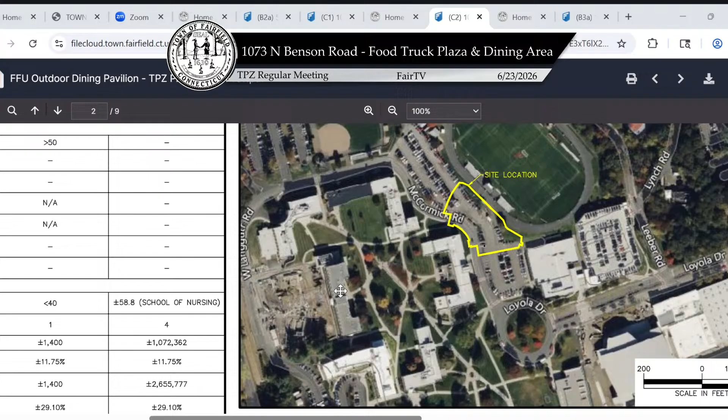Sure, hang on. We don't ask questions when folks give comment. Okay, well I wanted to ask about his personal experience in the 6 years leading up to this. I know, but I think it's important for the record. We don't do questions. I think it's important for the record in this case. I understand, we don't. Well, I'll say this, I don't want to cause... Hang on, okay, we don't, I thank you for your comments but we don't ask questions. I would like for him to be able to clarify. Can I ask if he submitted all this supporting information into the record? Yes, do we have all of this, or is this just being provided now?